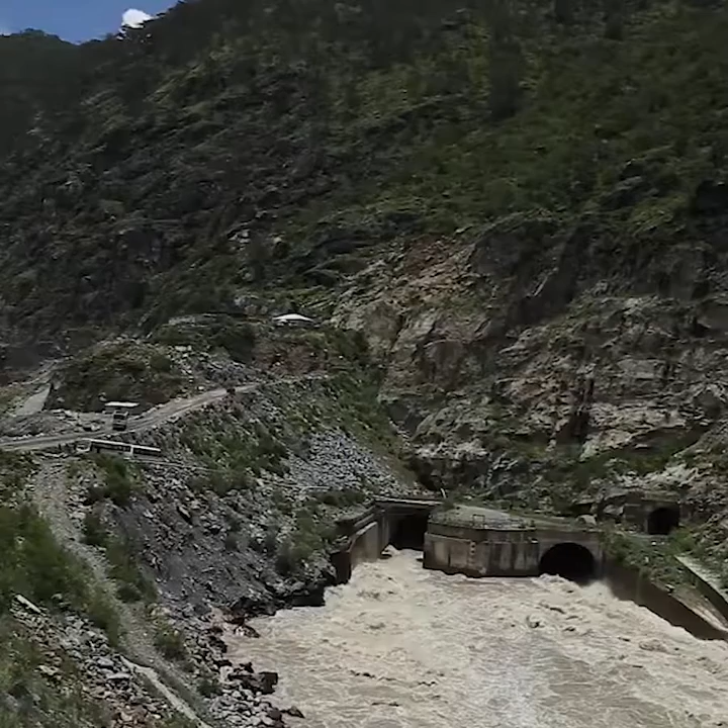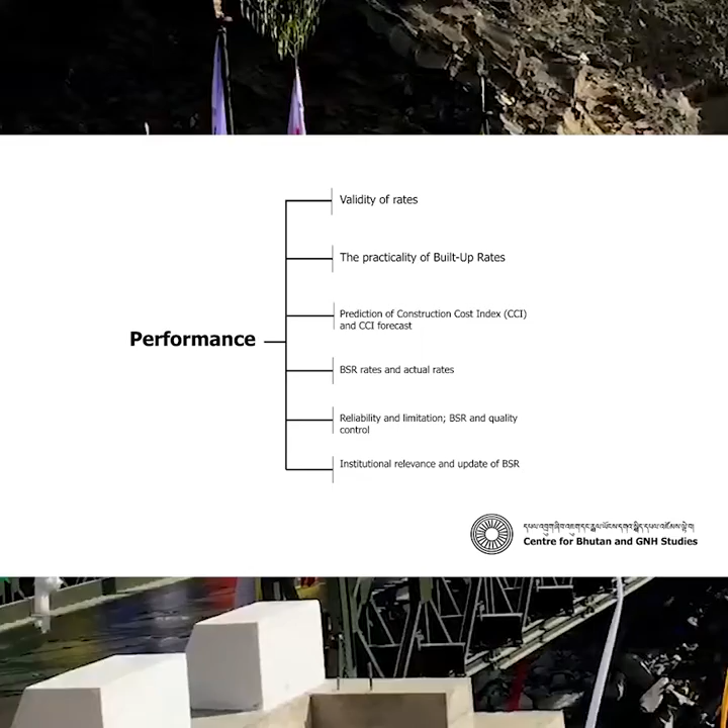The process of investing in infrastructure begins with the preparation of a cost estimate based on the Bhutan Schedule of Rates, also known as BSR. The performance of BSR depends on the validity of rates and its reliability for estimating construction costs, tracking cost development, and forecasting the eventual project cost.

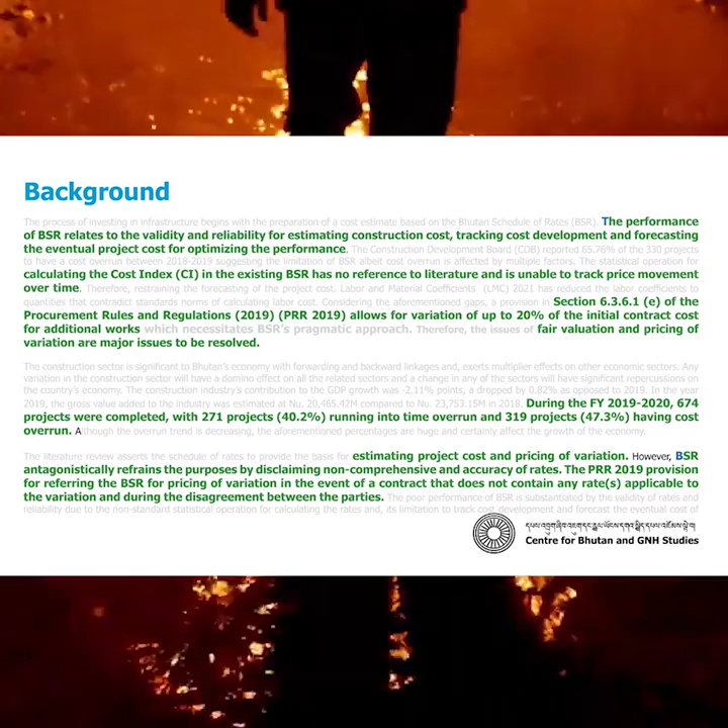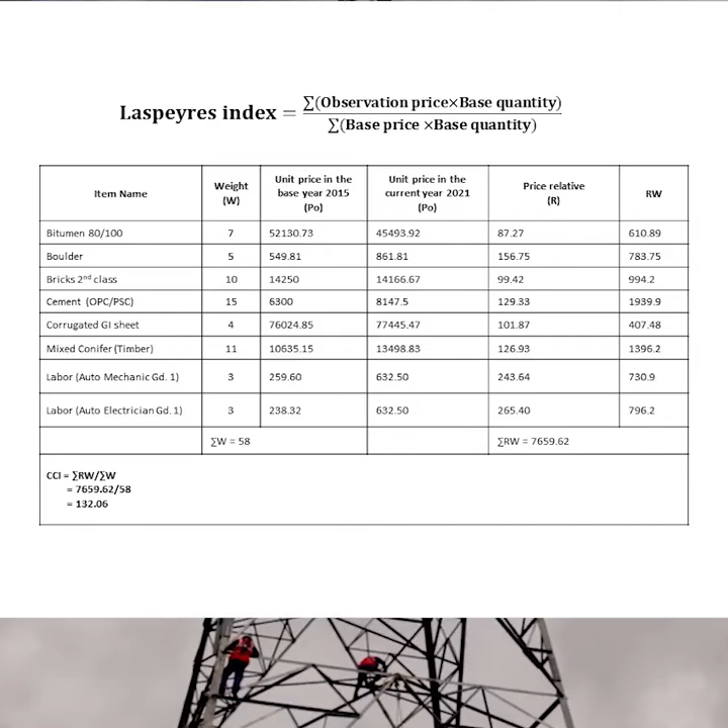The Construction Development Board reported 40% running into time overrun and 47% running into cost overrun out of 674 projects completed during the financial year 2019 and 20. The cost and schedule overrun had relatively remained constant over the last 5 years as per the CDB annual report. The calculation of cost index in the BSR does not efficiently measure the price movement over time.

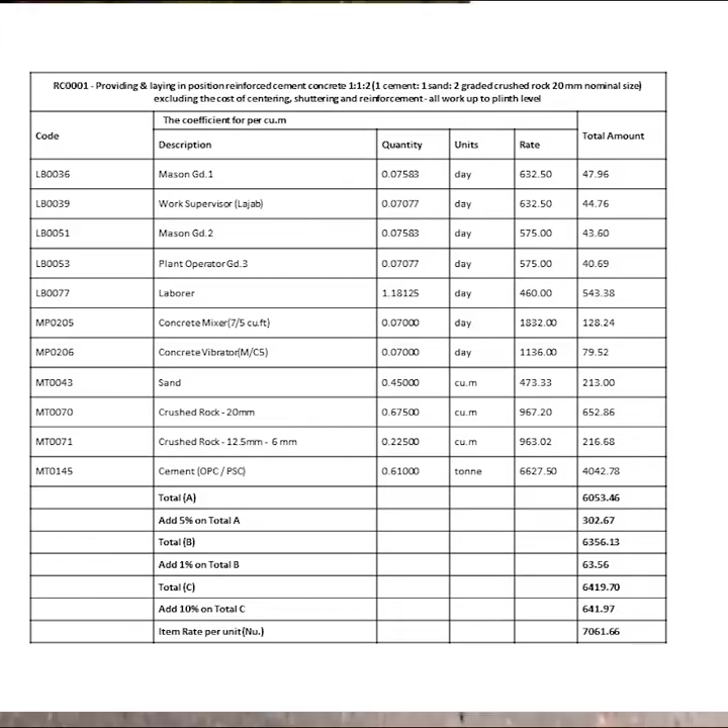Labor and Material Coefficient 2021 has reduced the labor coefficient to quantities that contradict the standard norm of calculating the labor cost.

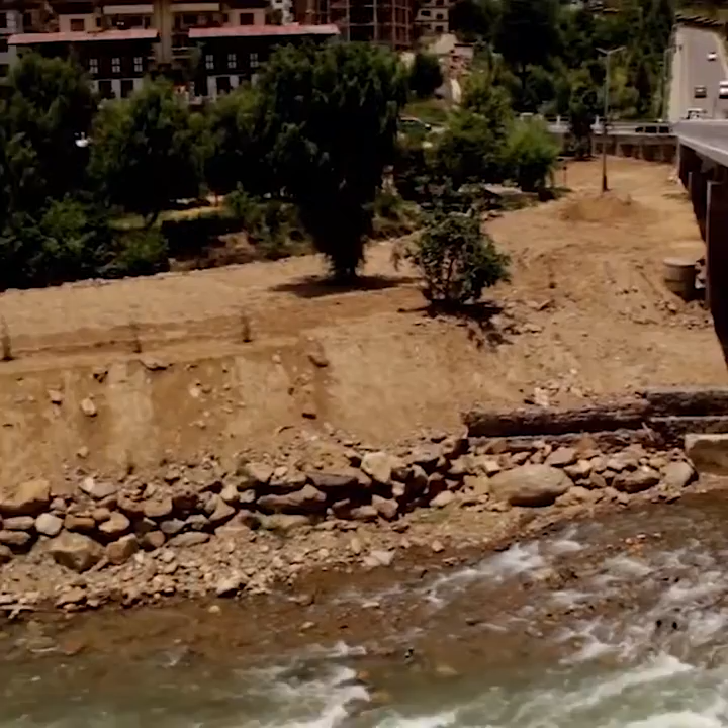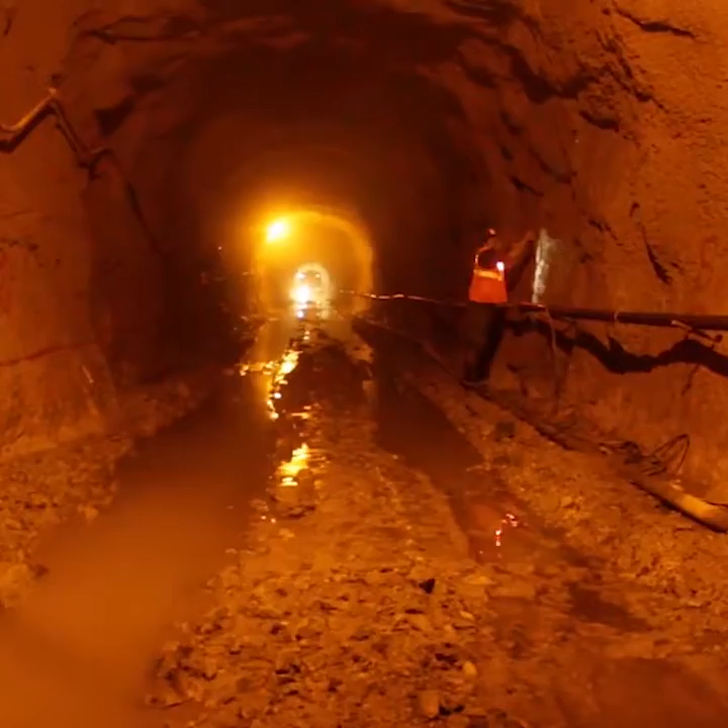The Procurement Rules and Regulation 2019 allows for variation up to 20% of the initial contract cost for additional works. The 20% leeway for cost escalation granted by the Procurement Rules and Regulations necessitates BSR's pragmatic approach for deriving the basic rates and built-up rates for construction items.

The issues of fair valuation of work and pricing of variation are the major issues yet to be resolved. The restriction imposed by the Procurement Rules and Regulation 2019 for using the brand has affected the maintenance of quality.

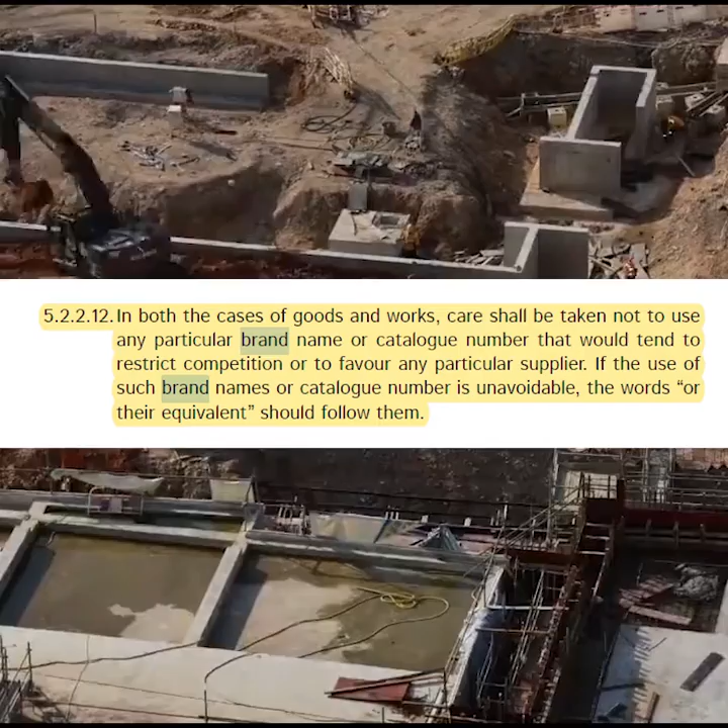The appointment of an arbitrator to represent one's organization, as provisioned by the Alternative Dispute Resolution Act of Bhutan 2013, raises an issue of conflict of interest.

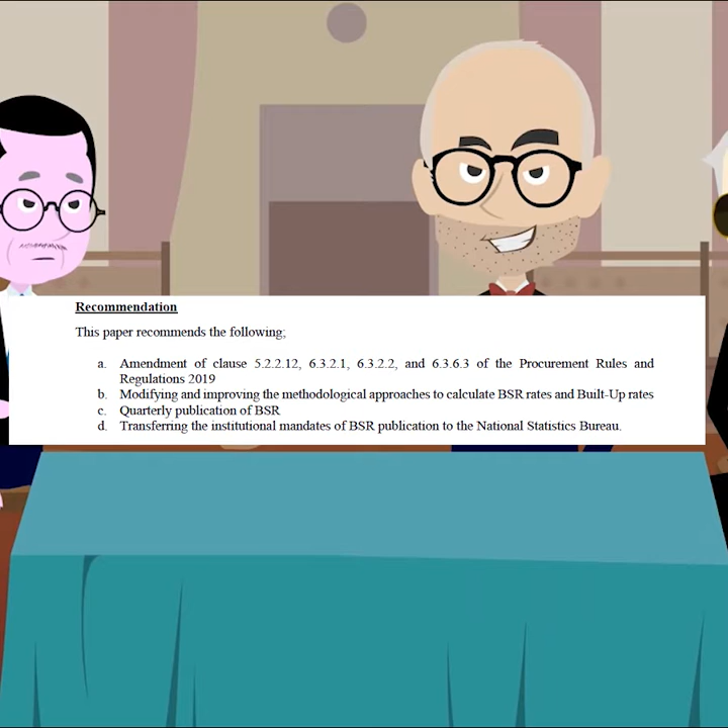This paper recommends the amendment of a couple of clauses of the Procurement Rules and Regulation 2019, besides recommending the modification and improvement of the methodological approaches to calculate BSR rates and built-up rates. This paper also recommends the quarterly publication of BSR and transferring the institutional mandates of BSR publication to the National Statistics Bureau.

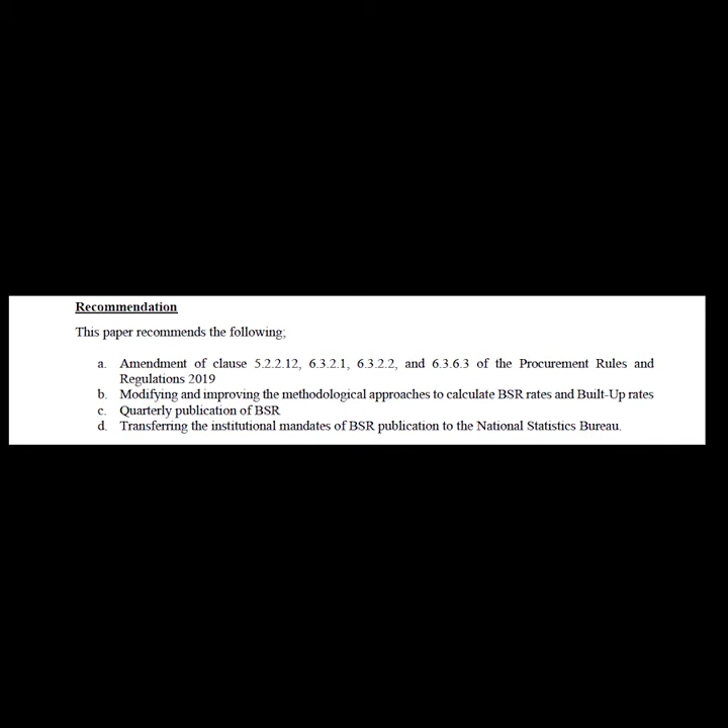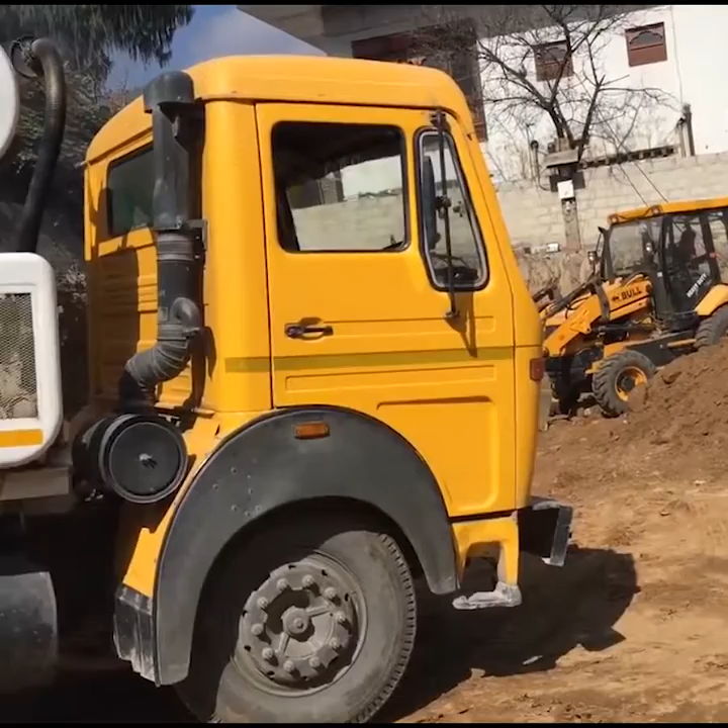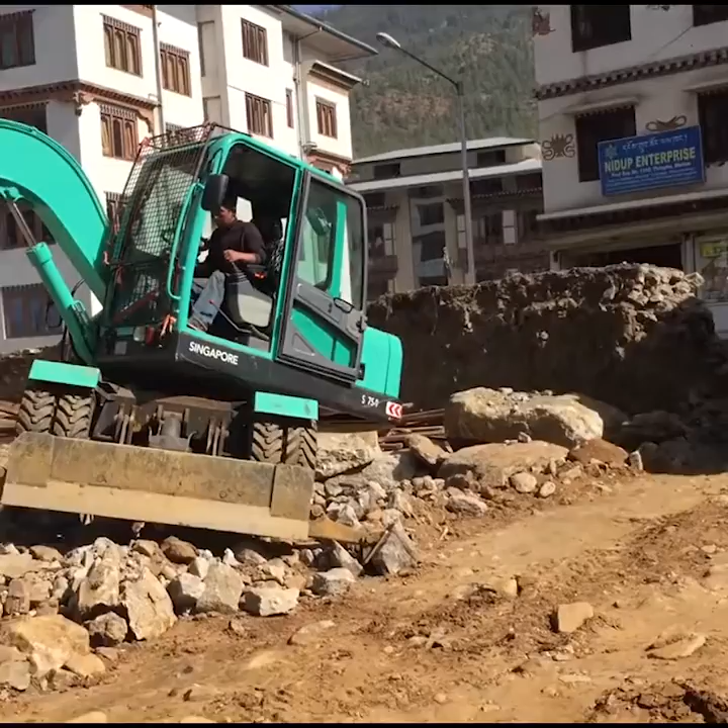The construction sector is significant to Bhutan's economy with forward and backward linkages and exerts a multiplier effect on other economic sectors. Any variation in the construction sector will have a domino effect on all the related sectors, and a change in any of the sectors will have significant repercussions on the country's economy.

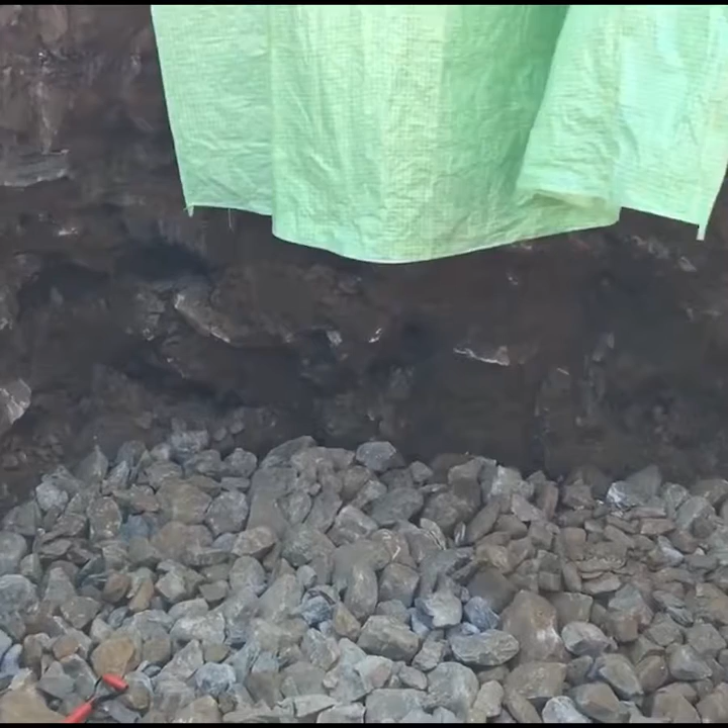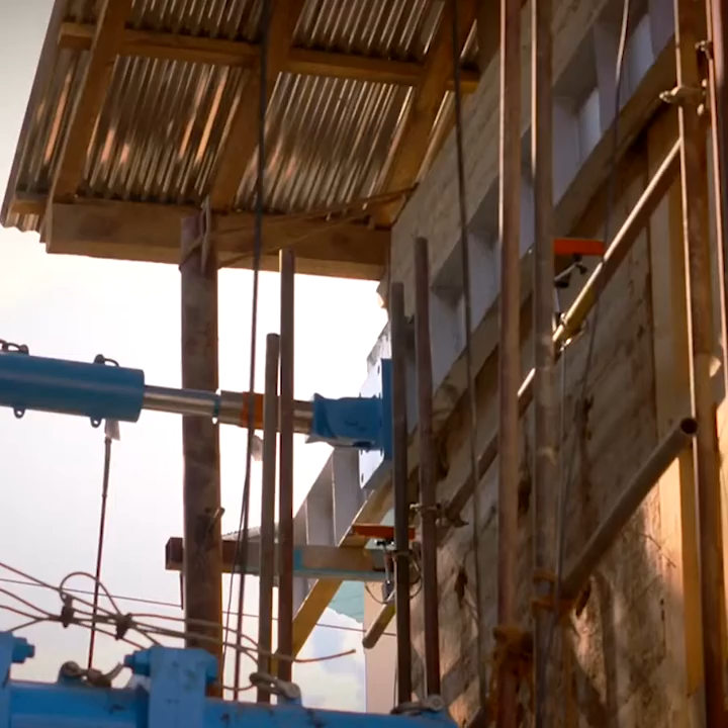The construction industry saw a negative GDP growth as opposed to 2019. The literature review asserts the schedule of rates provides the basis for estimating project costs and pricing of variation. However, BSR refrains from serving these purposes by disclaiming non-comprehensiveness and accuracy of rates.

The Procurement Rules and Regulation 2019 provisions the negotiation between the procuring agency and a contractor to agree on suitable rates if the contract does not contain any rates applicable to the variation. Large and complex projects are susceptible to variation, requiring the addition of a new item of work that is outside the bill of quantity.

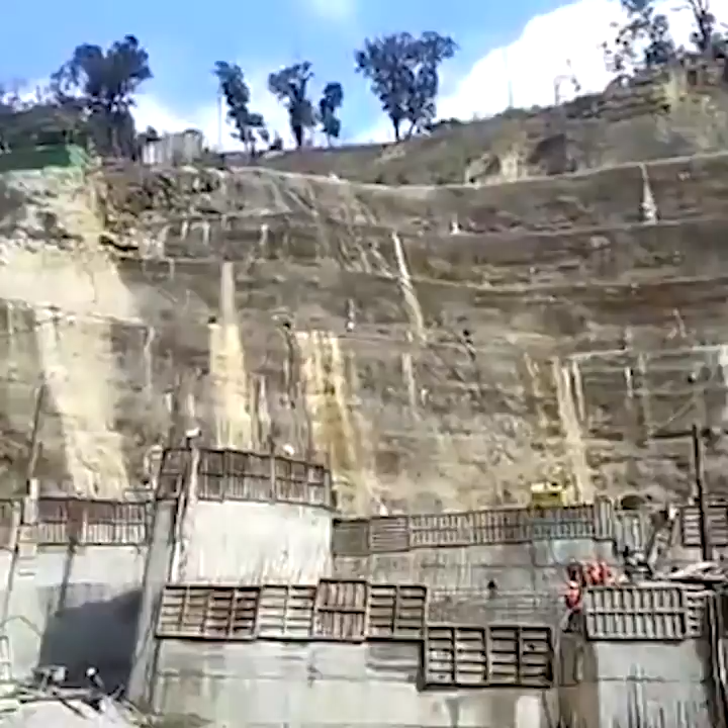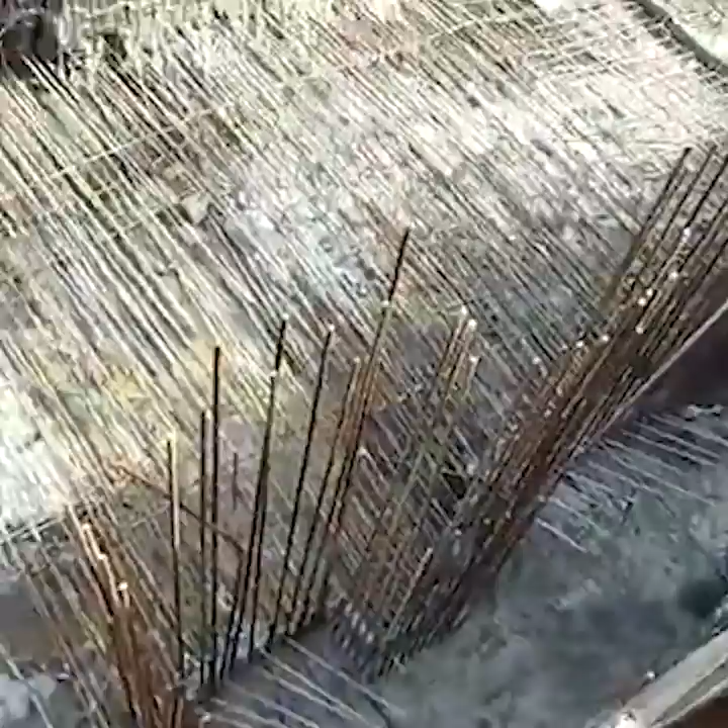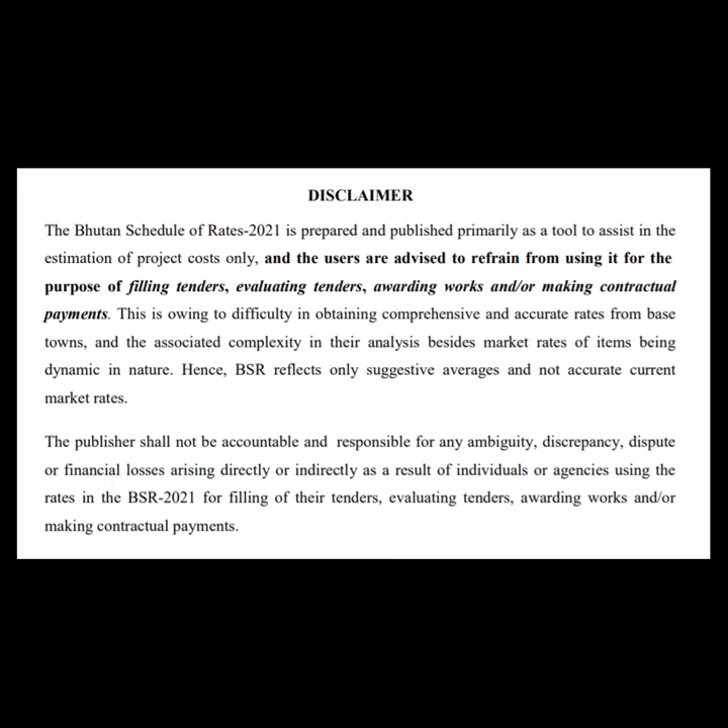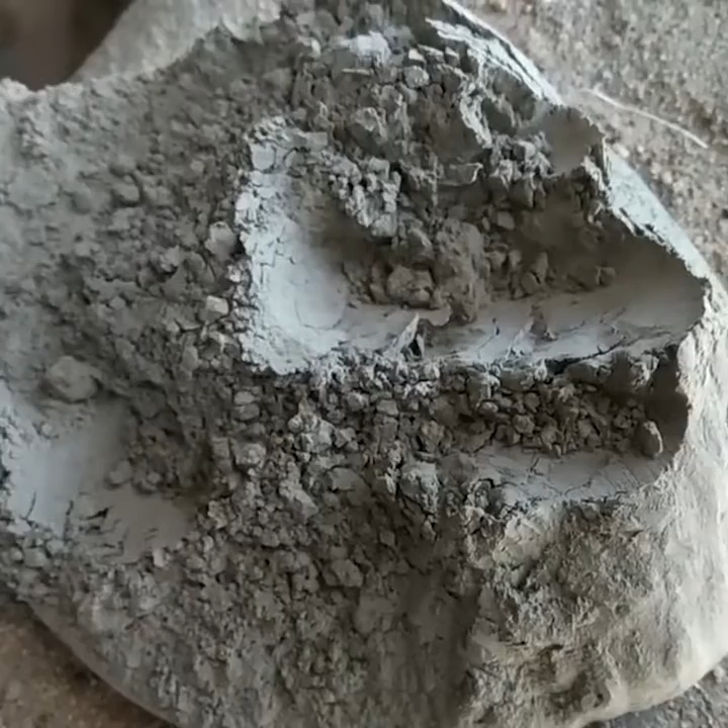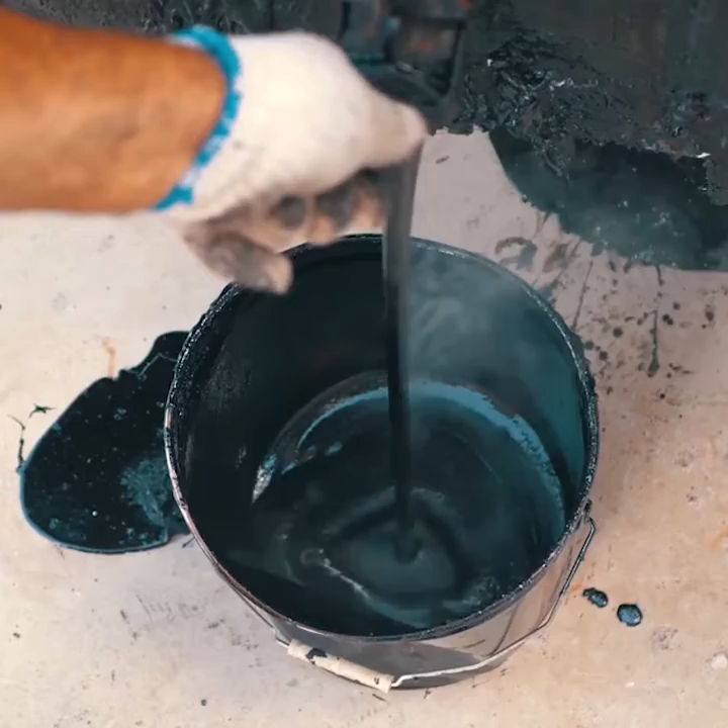Similarly, the Dzongkhag engineers mentioned that the BSR has not included the recent and technologically advanced products, and the obsolete materials are not replaced. Inevitably, huge projects will have extra items of work requiring new materials which are not covered by the BOQ. Because the additional materials are not reflected in the BSR, the procuring agency is unable to price based on the BSR and must rely on the contractor's rate analysis.

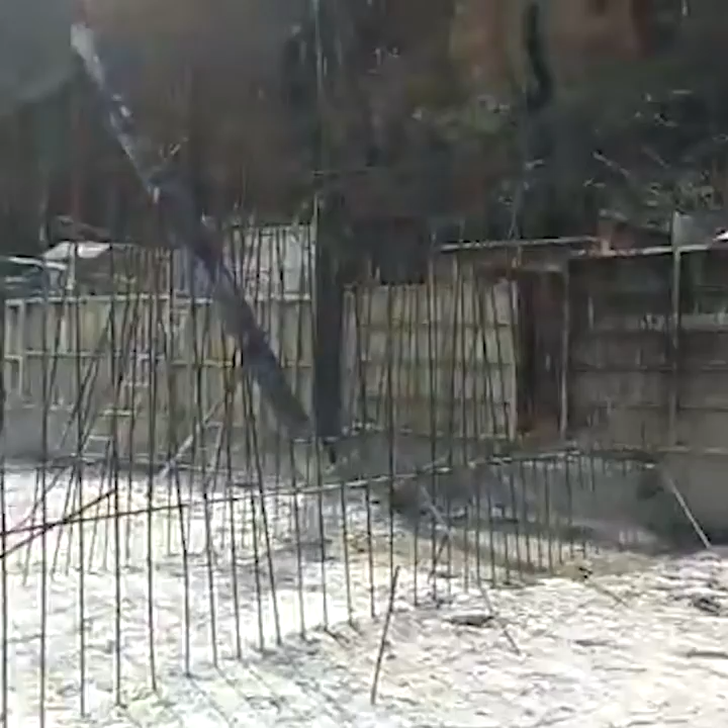BSR requires the specification for building and roadworks to be read in conjunction, and it applies at the site and is aimed at ensuring the material used in the construction meets the specification. The specification shall be based on proven standards to lower the risks of non-compliance.

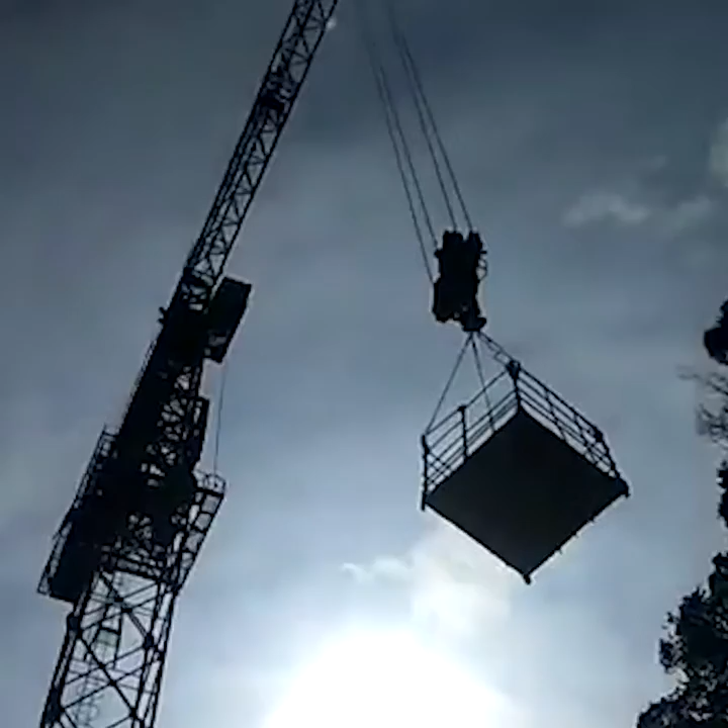However, the specification for building and roadworks does not specify the conformance of material to the national standards and use of products certified by the Bhutan Standards Bureau. The use of certified products ensures the broader aspect of safety and quality before the field by setting requirements such as maintenance of production process and third-party testing.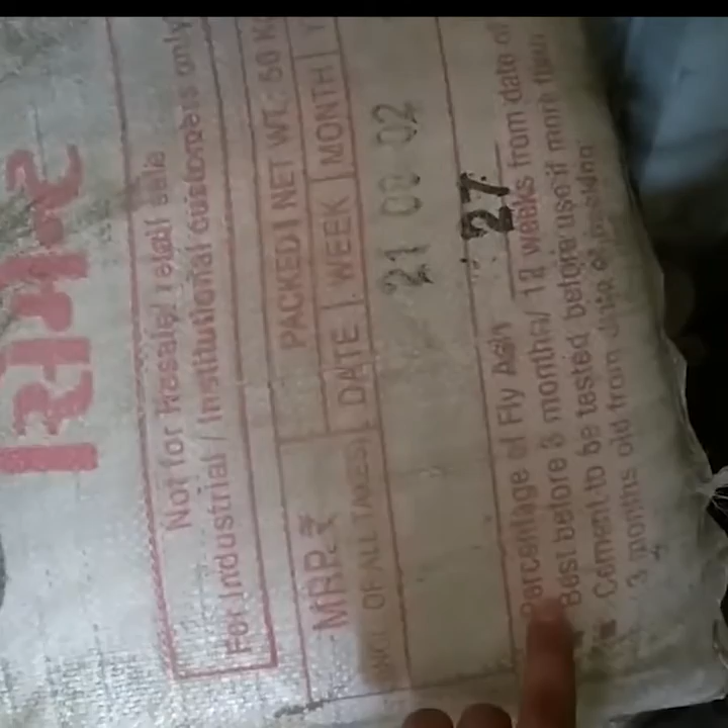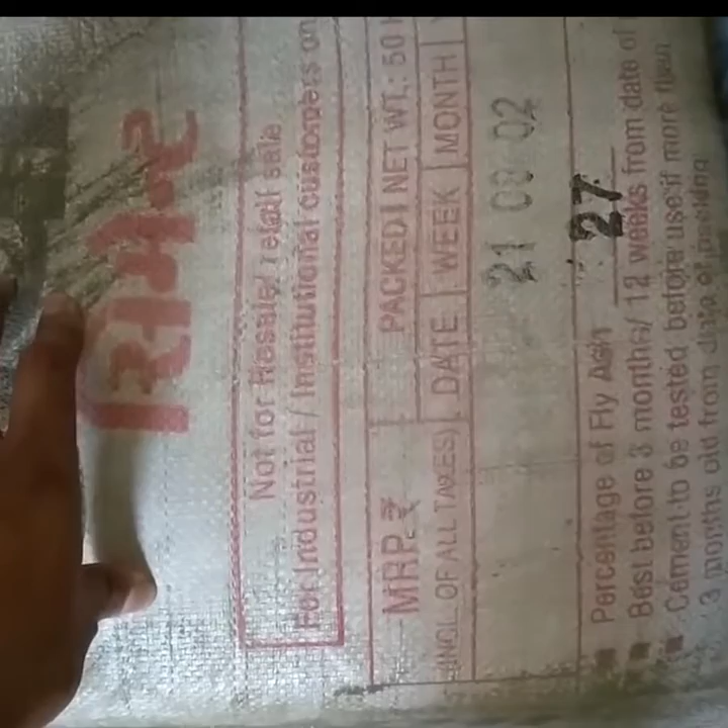The market offers a wide range of products or brands meeting the specification, but the quality and the price vary significantly among the products depending on the brands. The Procurement Rules and Regulations 2019 restrict the use of particular brand names, and the restriction negatively affects the quality control as the contractor normally goes for cheaper brands meeting the specification but not necessarily providing the required quality. Therefore, specifying the brands beside the conformance to the national standards would ensure the quality and rationalize the payment.

This study validated the basic rates given in the BSR. The rates given in the BSR raise a plausible doubt because between the year 2017 and 18, 65% of the basic rates for civil material and 90% of the basic rates for electrical materials were identical.

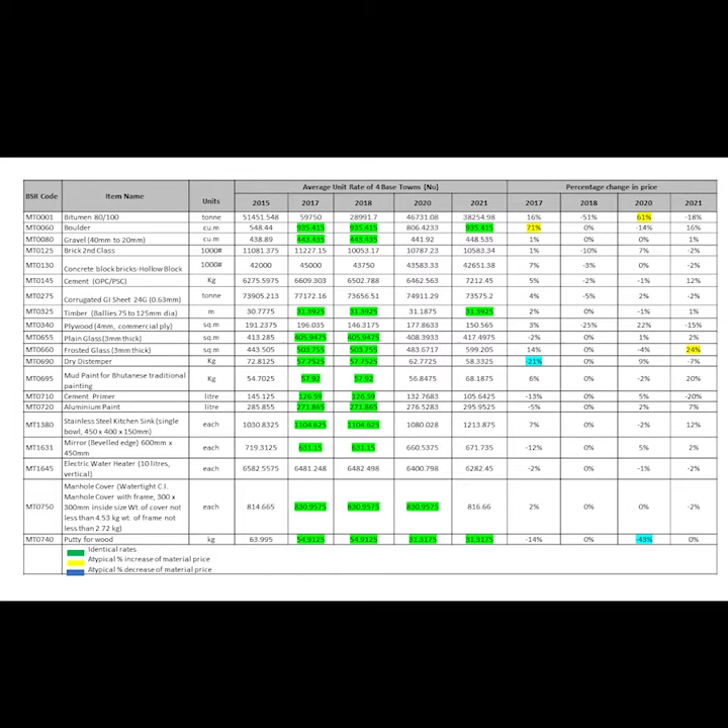The study compared only 40 products randomly from civil and electrical among approximately 9,144 materials listed in the BSR. Most materials such as flat-type brass thimble, a residual current circuit breaker, and lamp showed unusual percentage changes in the rates for the year 2020 as opposed to 2018, besides other materials also showing unusual percentage changes in the rates.

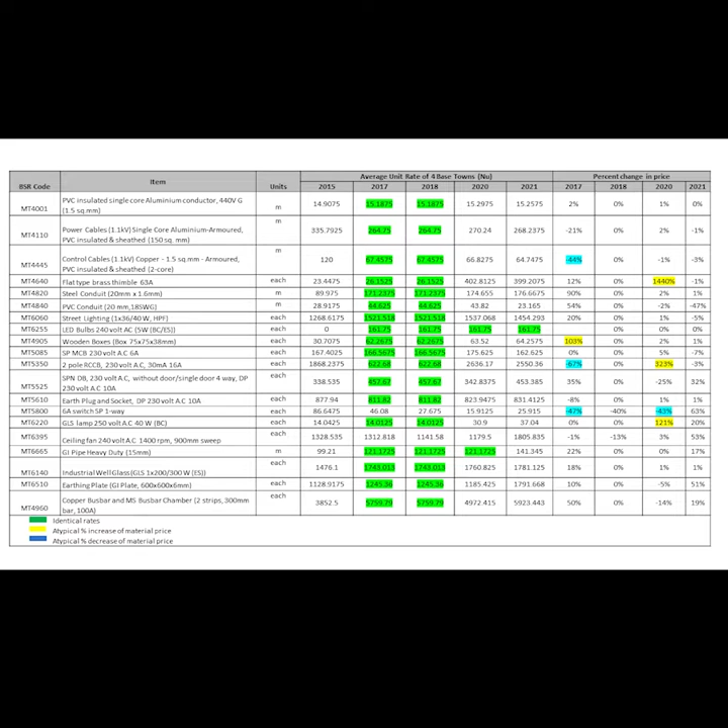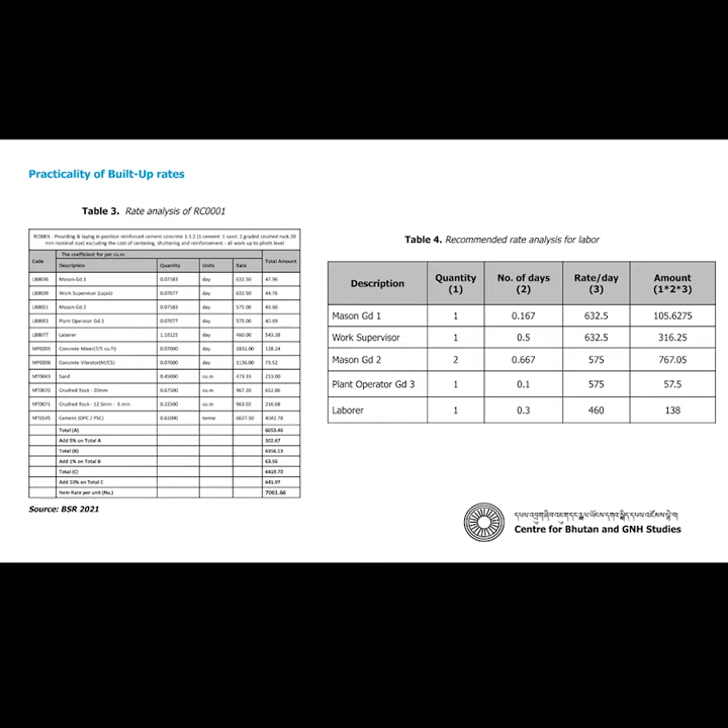The built-up rates of items in the BSR are found to be impractical since the labor rate neither specifies the number of labor required nor the amount of time required by the labor to complete each work. This is because the labor rate as such must include both quantities of the labor and time required by the labor to arrive at accurate cost.

The construction cost index was computed using the Laspeyres index for the basket of items selected for roadworks and building materials, from the base year 2015.

The construction cost index trend showed periodical variation between 2013 to 2021, with subsequent increases and decreases in the trend line. Typically, the CCI ascends, indicating inflation in the price of material. However, the study indicated that the prices of material for roadworks were fluctuating randomly.

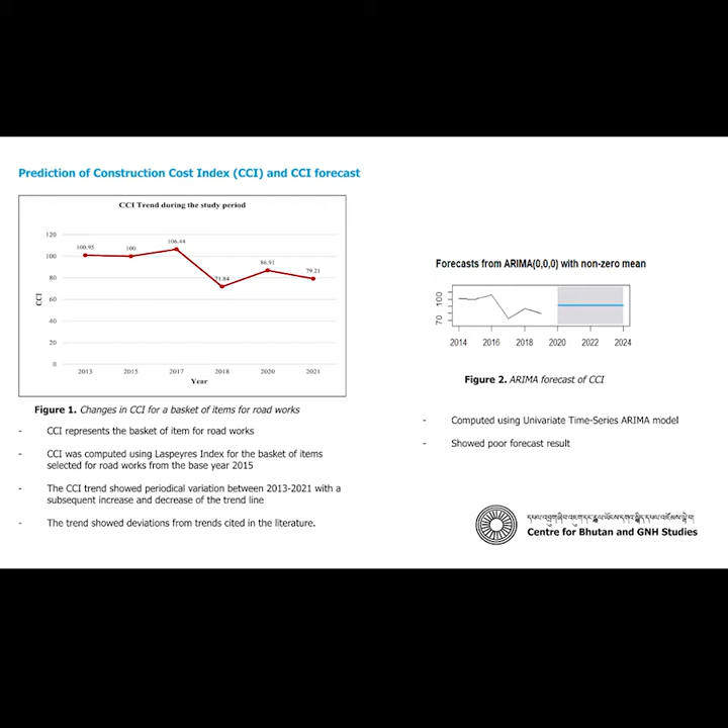The forecast result, computed using the univariate time series ARIMA model, also showed a horizontal line projection of the construction cost index, indicating a poor forecast result due to inadequate and inconsistent historical data.

The BSR rates are higher than the market rate according to 56.25% of the Dzongkhag engineers, as opposed to 43% of Dzongkhag engineers claiming that the BSR rates were lower.

BSR rates were calculated using data from the census survey that included all sizes of stores. Significant disparities in the selling prices of items between large or wholesale stores and retailers were observed.

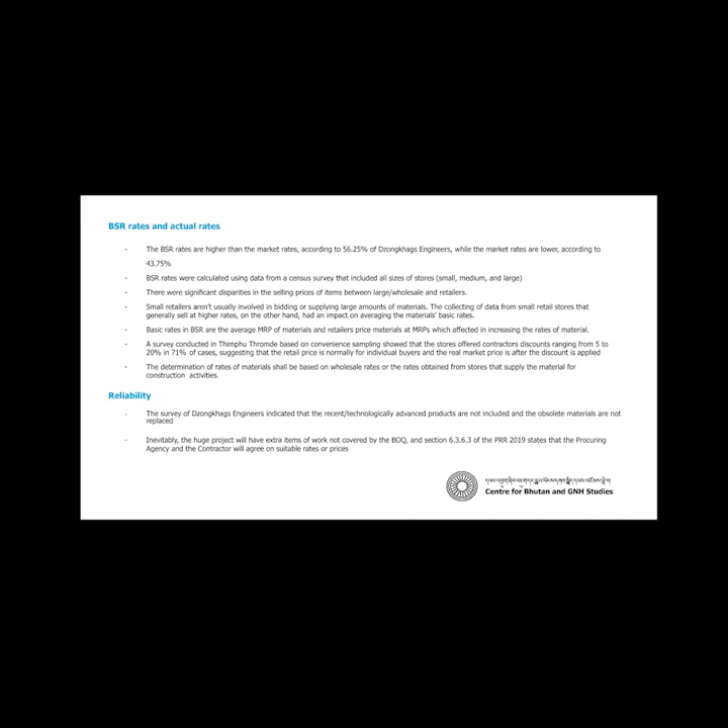Small retailers aren't usually involved in bidding or supplying large amounts of material. Collecting data from small retail stores, which generally sell at higher rates, had an impact on averaging the material's basic rates.

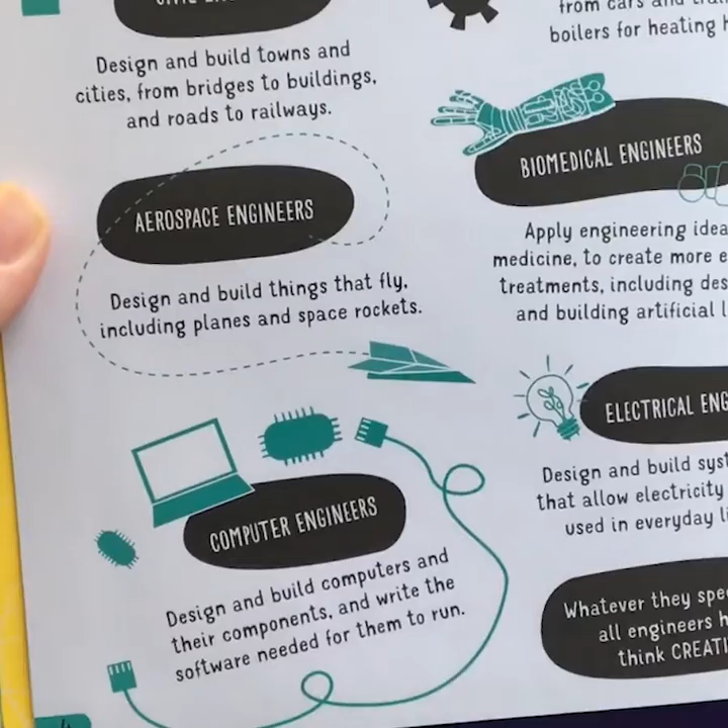The review of literature indicated the preparation of BSR by institutions providing key statistics on the economy. In Egypt, the schedule of rates is prepared by the Central Agency for Public Mobilization and Statistics. However, in India, the Central Public Works Department is the nodal agency for preparing the schedule of rates.

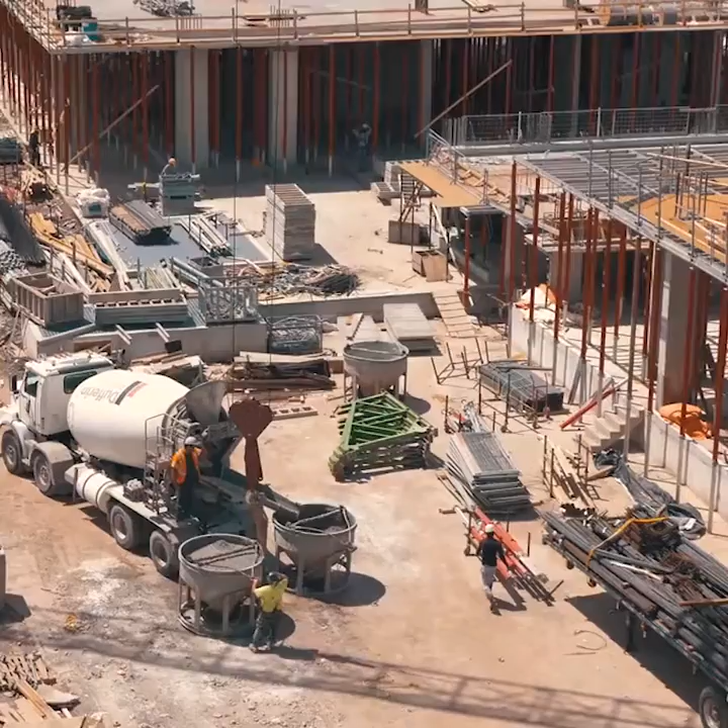The Bhutan Alternative Dispute Resolution Center has completed 101 arbitral awards between the years 2018 and 2020, and typically all disputes related to the construction industry arise from violation of Clause 7 of the Standard Bidding Document, such as cost escalation, price adjustment, and BOQ.

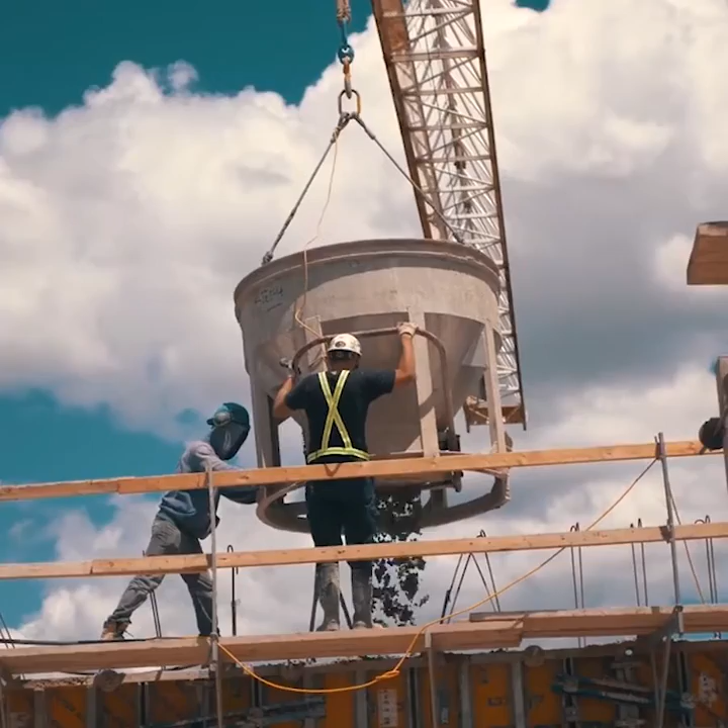The highest disputed amount resolved at the center is related to the termination of contract, worth Nu 102 million, followed by violation of general conditions of the contract, worth Nu 92 million.

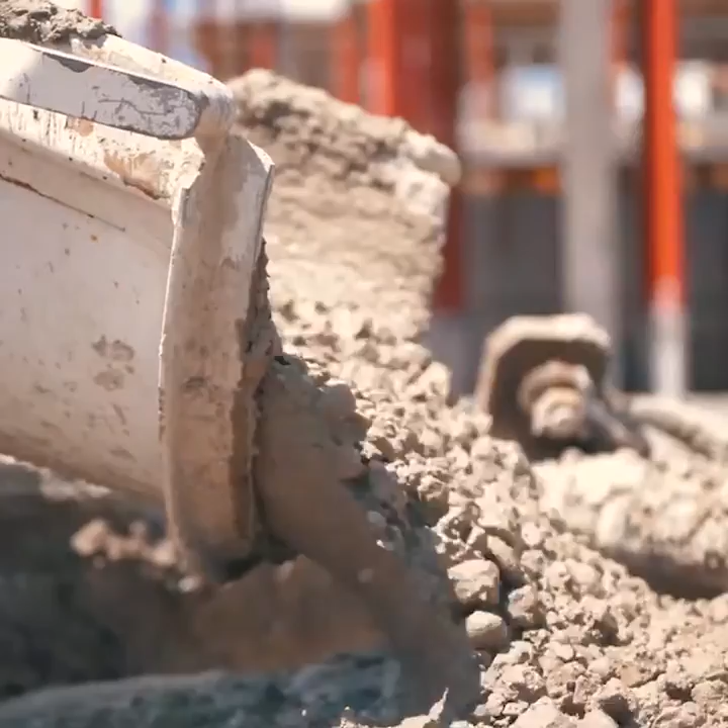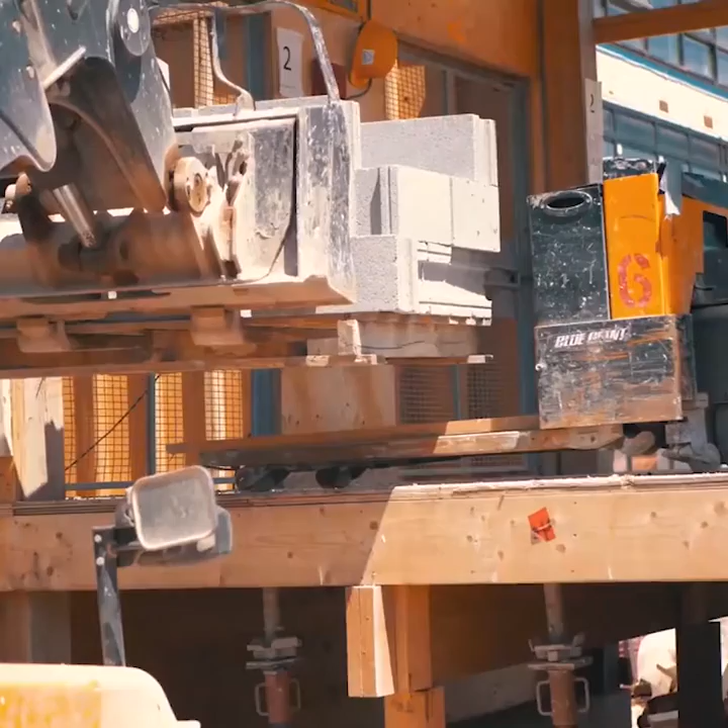Most of the civil servant arbitrators are from the Ministry of Works and Human Settlement, Ministry of Education, Ministry of Health, and Construction Development Board. These three ministries are government agencies involved in large-scale public construction projects, whereas CDB is an autonomous government agency that governs the construction industry, including contractors, architects, and engineers.

Section 54 of the Alternative Dispute Resolution Act of Bhutan 2013 allows the parties engaged in a dispute to choose and appoint the arbitrator at their discretion. This provides the parties involved in the dispute the freedom to choose their arbitrator, and the concerned ministries will probably appoint their own registered arbitrator employee to represent their ministry as attorney for conflict settlement at the center.

The average percentage cost and time overrun out of total completed projects over the last 5 years was 57% and 47% respectively. This figure indicates that almost half of total construction works ran into cost and time overrun each year for the past 5 years.

It is expected that new and upcoming projects are also likely to encounter both time and cost overrun if the status quo continues. During the financial year 2019-20, 1,315 works were awarded, amounting to 9.6 billion.

Considering relatively the same construction management for the next 5 years, it is expected that 57% and 47% of total works are likely to suffer cost and time overrun, which would incur millions in monetary loss.

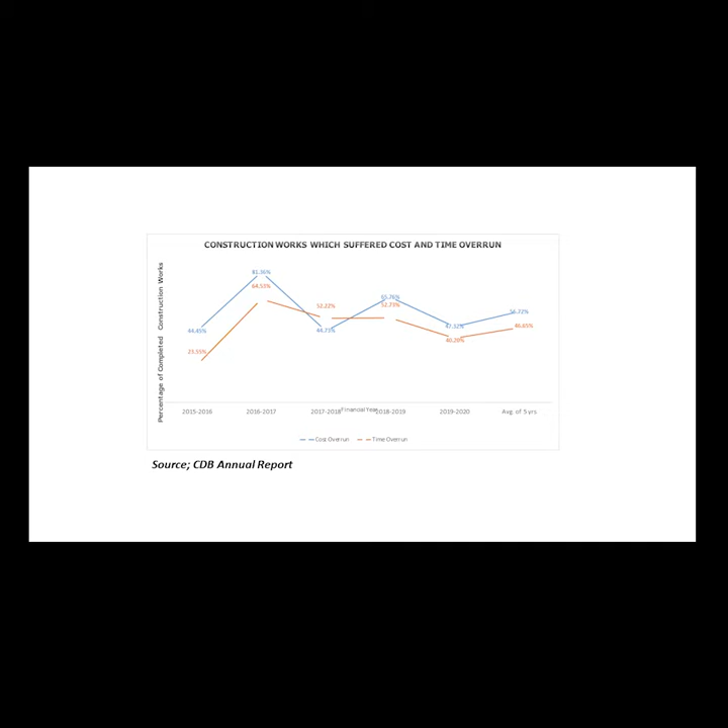The BSR shall be prepared and published for estimating and forecasting the cost of construction, and as the basis for making contractual payment.

The Procurement Rules and Regulation 2019 must provision the valuation and pricing of variation for additional work with similar character and similar condition based on the BSR, instead of negotiating between the procuring agency and contractors to agree on suitable rates.

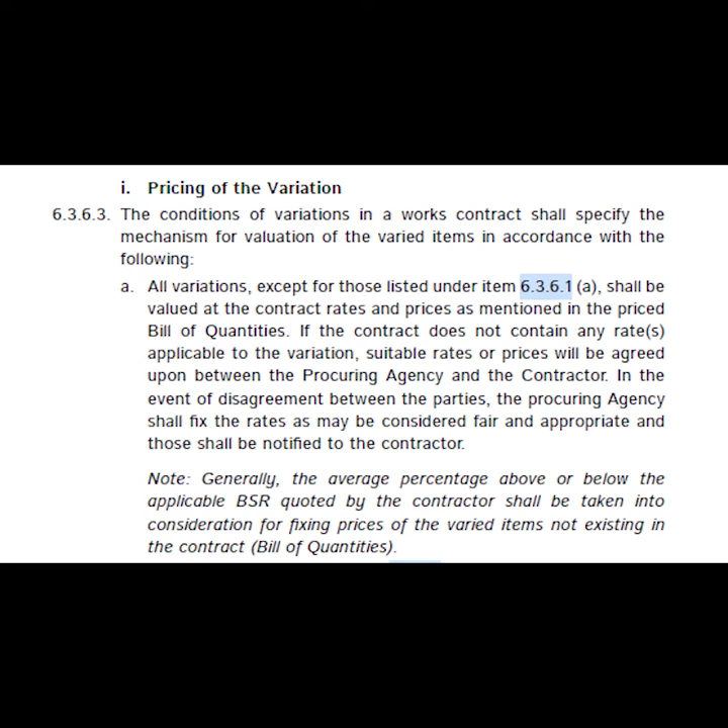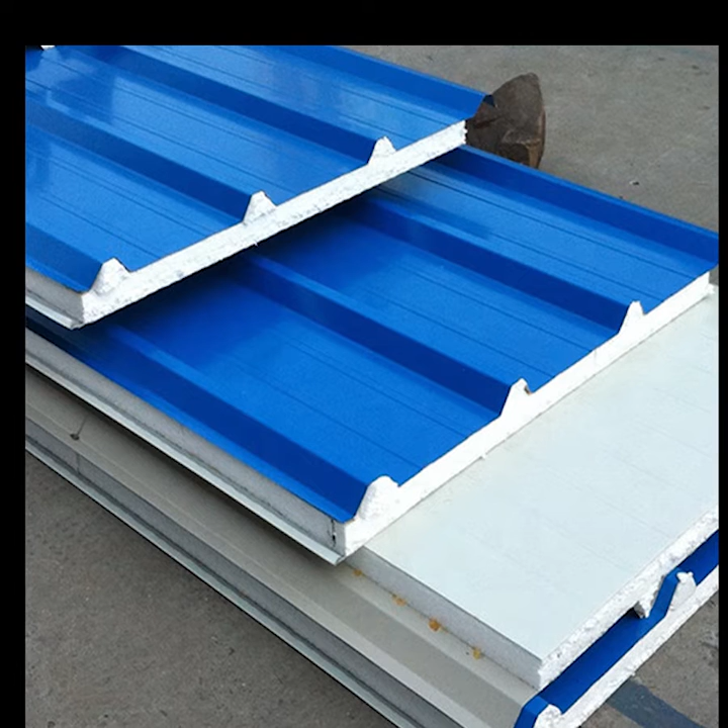BSR shall list all modern and technologically advanced materials to ensure the procuring agency prices based on the BSR whenever additional items are included in construction which are outside the BOQ, sheltering from biased rate analysis done by the contractor. The cost escalation factor shall be determined based on the construction cost index, and anticipated extra costs likely to be incurred due to inflation shall be included in the cost estimate.

The procuring agency must identify the material where price adjustment shall be made, unlike the Procurement Rules and Regulation, which allows price adjustment for all materials.

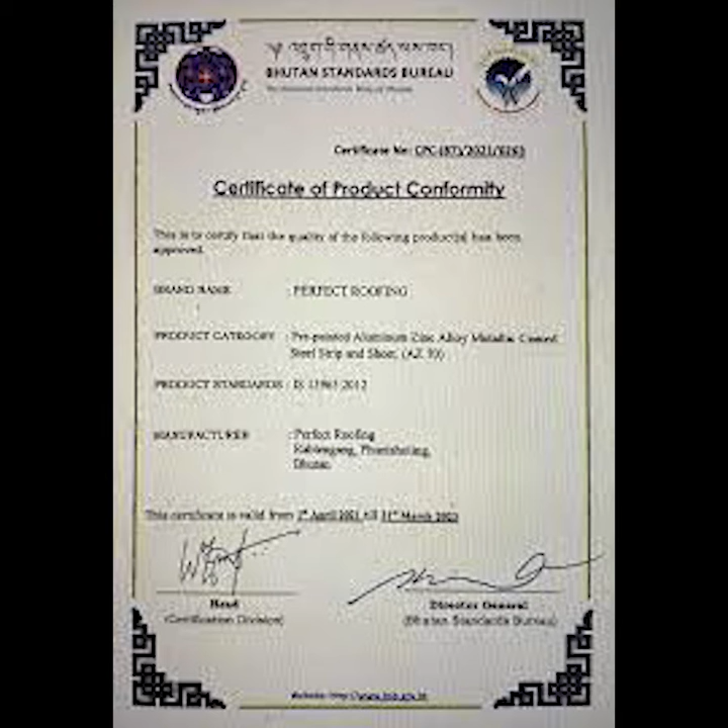Procurement Rules and Regulation must not restrict specifying the use of a particular brand, and the BSR shall specify the brand in conformance to national standard and use of products certified by the Bhutan Standards Bureau.

BSR shall be published by the National Statistics Bureau periodically and updated quarterly to ensure statistically significant project estimation. The statistical operation for calculating the cost index shall be based on the Laspeyres index to enable tracking of cost development and forecasting the final cost of the project.

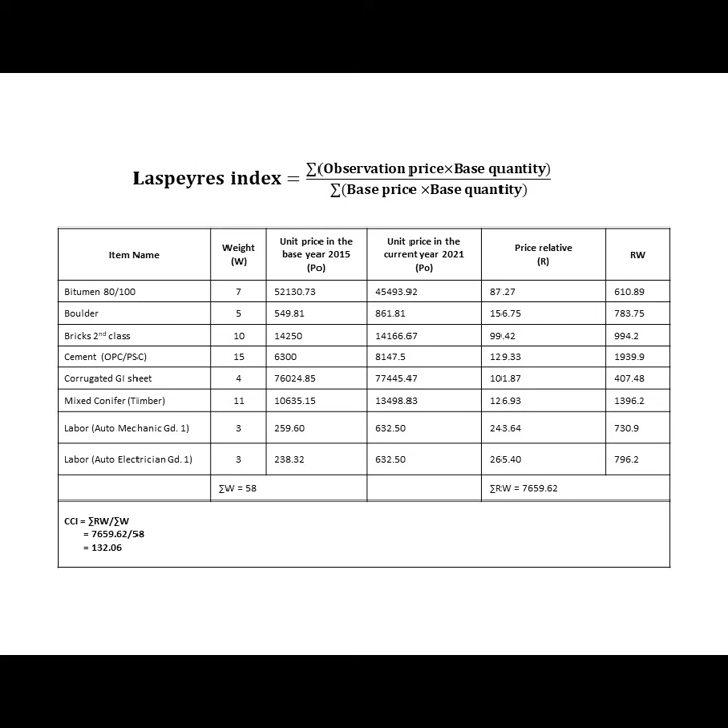The basic rate shall be based on wholesale rates instead of the average of maximum retail prices obtained from retailers. The Labor and Material Coefficient 2020-21 shall be renamed as Guide for Built-up Rate Analysis.

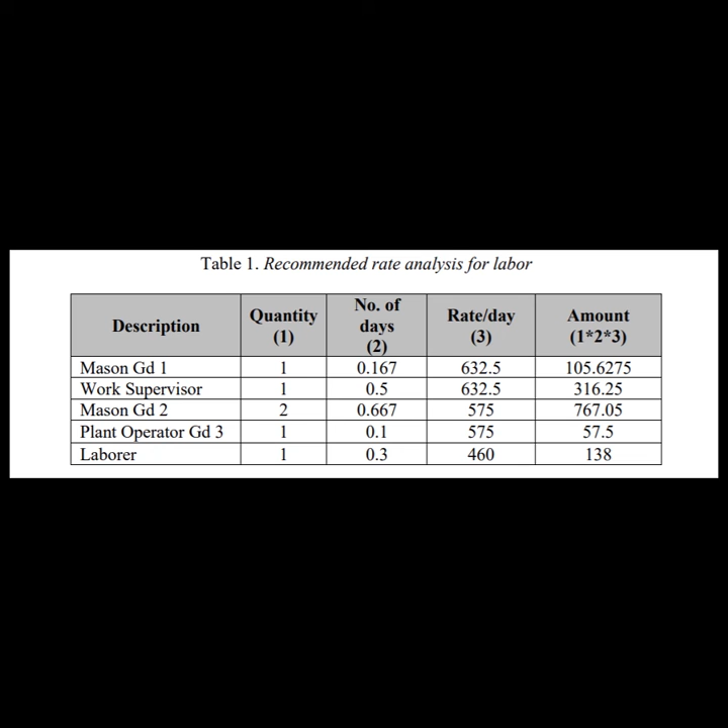The labor cost for built-up rate analysis shall be calculated based on the actual number of days, or man days, or working hours required to complete the works.

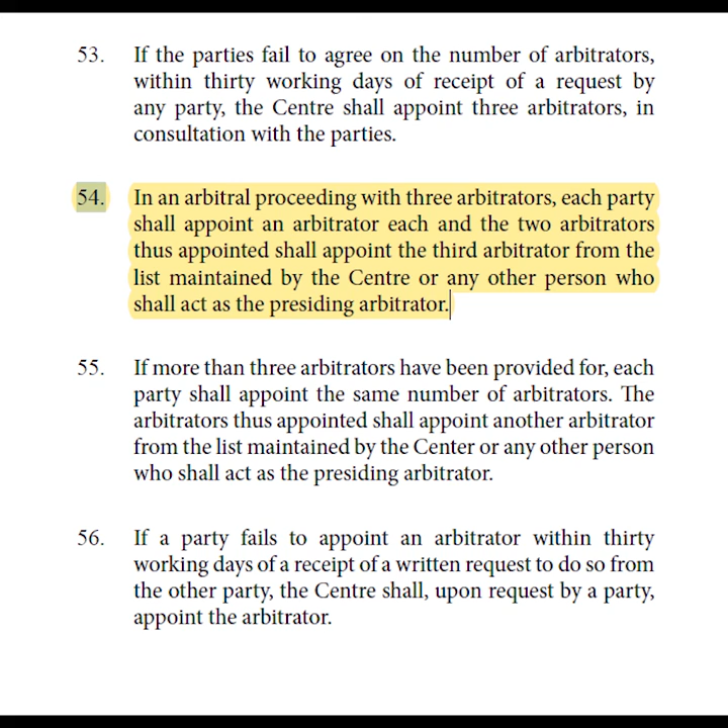The Alternative Dispute Resolution Act of Bhutan 2013 shall not provide for the appointment of an arbitrator from one's own organization where the appointee is already a party to the dispute.